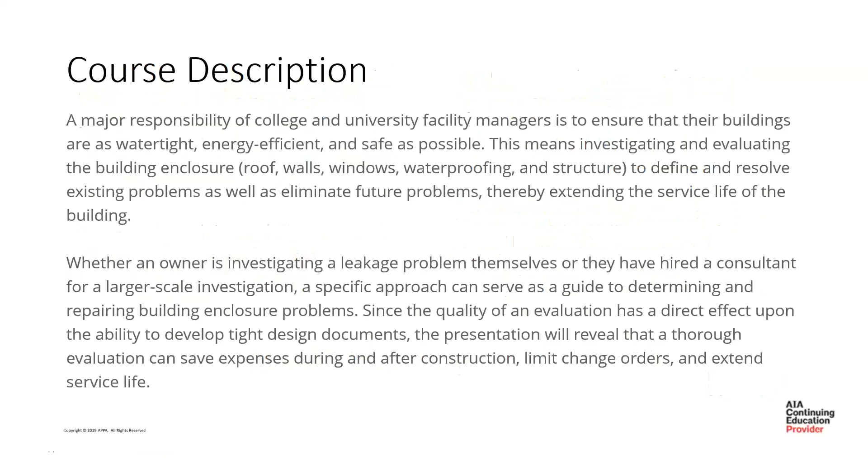As mentioned, I'm Kimberly Kilroy, one of our project managers in the Building Enclosure Design and Consulting Group at Gale, and here with me today is Jeff Zisk. We'll be presenting the building blocks of enclosure evaluation, just to give you a sense of our process when we get to a site to evaluate a building, look at defects, and recommend repairs.

Thanks, Kim. I'm Jeff Zisk. Thank you, everybody, for joining us today. So we're here to talk about the building blocks of enclosure evaluation. To give you a little background and the path of how we're going to go through this presentation, we're going to start with review of existing information. Then we're going to get into field inspection and visual evaluation, and also some access methods to do that work, then talk about some testing options, and then get into report and design documents.

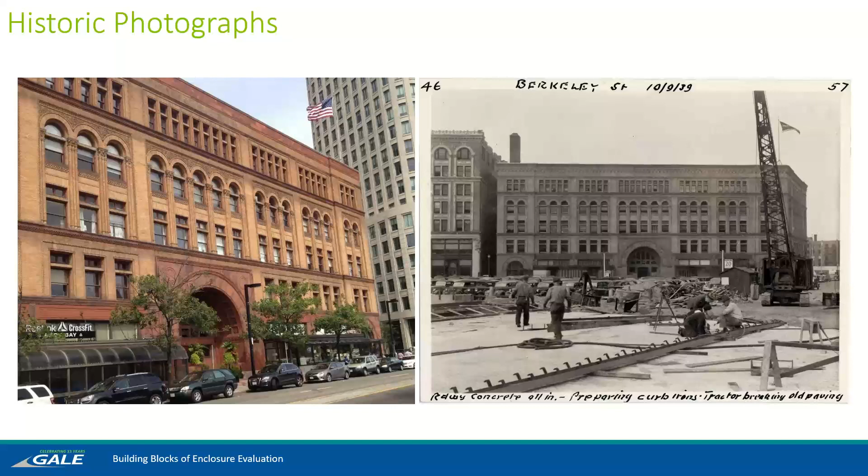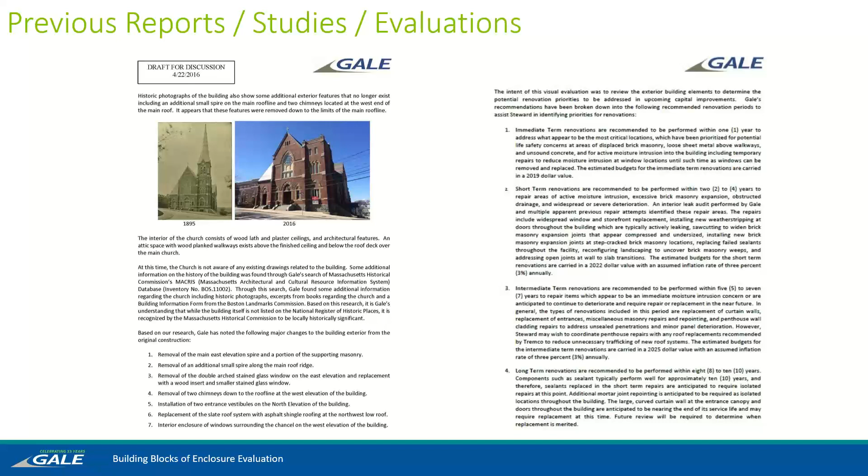Another option would be any previous reports, studies, or evaluations that the owner may have. And these are just a great resource of what's going on with the building, what may be a recurring issue, etc. Similarly, if there's any original drawings available, either from the original construction or from previous renovations, it's a good option to give you a sense of what you'll be expecting when you get on site.

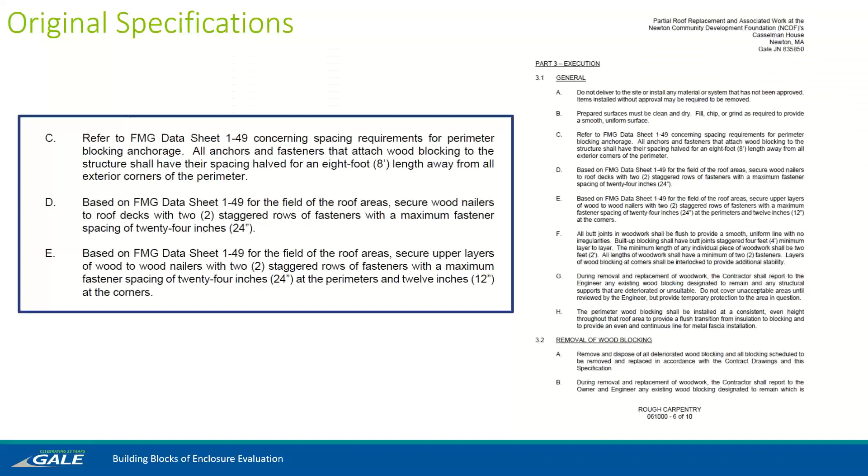And project specifications will give you some more performance-related details. And if you have original submittals for construction, this will give you material-specific information for the particular membrane that was selected, not just the group of them that might meet the performance requirements or whatever your materials may be.

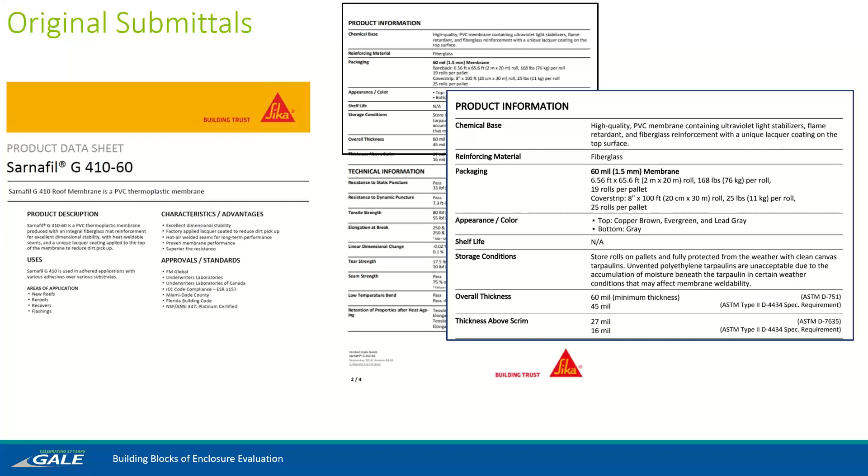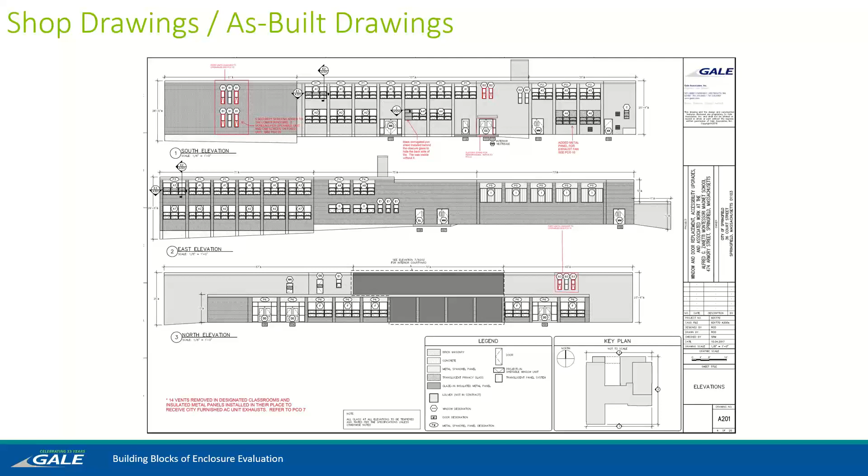On that note, if there's any shop drawings or as-built drawings available from when the building was in construction, this is really going to give you the closest to your current conditions. So I'm sure you've all seen construction projects change as they move along, either due to owner requested changes or unforeseen conditions. So having these as-built drawings will let you know if maybe windows moved around, if we added or reduced the scope, if there were some material changes, etc.

If you don't have any existing information specific to your building, just knowing the approximate time the building was built can also provide you with some general information. You can look at building codes from that time or industry standards, either the Brick Industry Association, FM Global, or other groups that will provide you kind of typical expectations at the time, typical construction materials and procedures, in addition to those code requirements from the period.

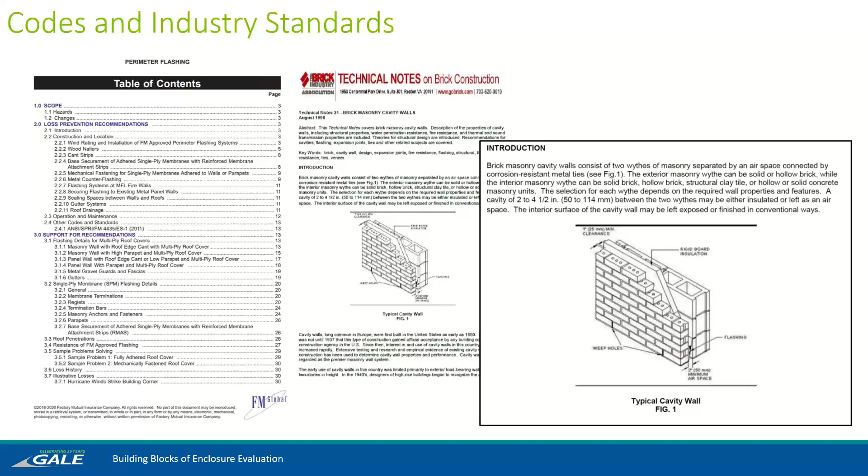Once you've done all of your research, you'll move on to your field evaluation. And this is really when you get out into the field on site and you can get eyes on what you're looking at. I like to start mine off with the leak audit. It lets me walk the entire interior of the site, and most importantly, it lets me talk to the owner and to facilities personnel who are living and working in this building day to day and are going to be much more familiar with it than I am.

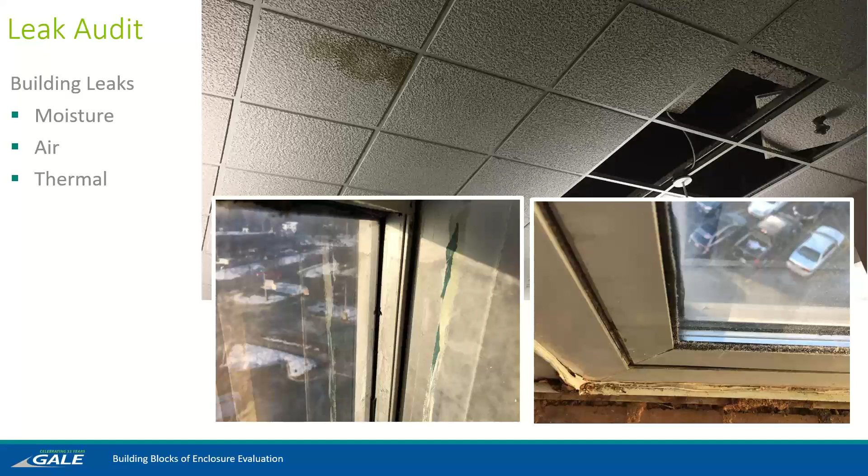While we're doing our walkthrough of the building, we like to document any active or previous moisture infiltration, as well as any airflow or thermal losses that the owner or facilities director might be aware of. This is also a great time to talk about previous repair histories or services that have been done to the building. On this, you'll see just a typical leak audit sheet for an example as we went room through room, identifying the staining, where it was, and discussing with the owner any previous concerns. Maybe it only leaks during storms where the wind blows in a certain direction. Maybe it leaks all the time. It really is going to depend on where you are and the actual specific building you're looking at.

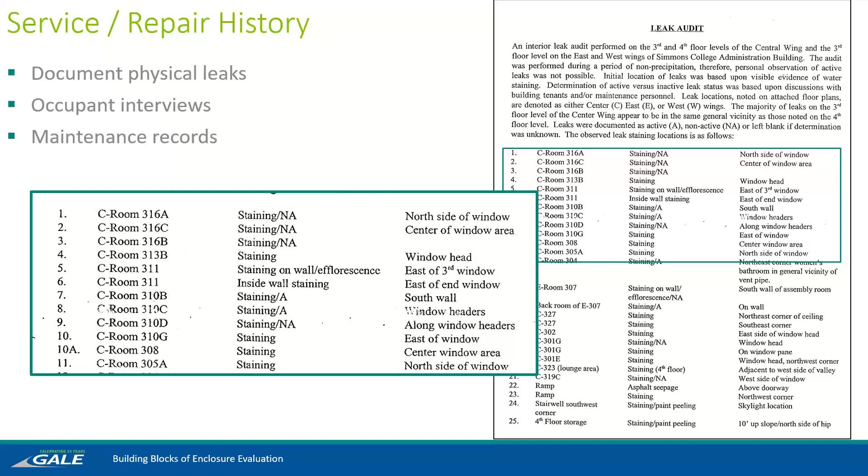A fun side note here, we actually were in Arizona looking at a building where, come to find out, the roof had been leaking for years, and facilities just changed out the tiles every time it rained because it didn't rain that often. It seemed easier than managing the problem. They just addressed that symptom, and so walking through the building, we wouldn't have known if we hadn't had that inside information from them.

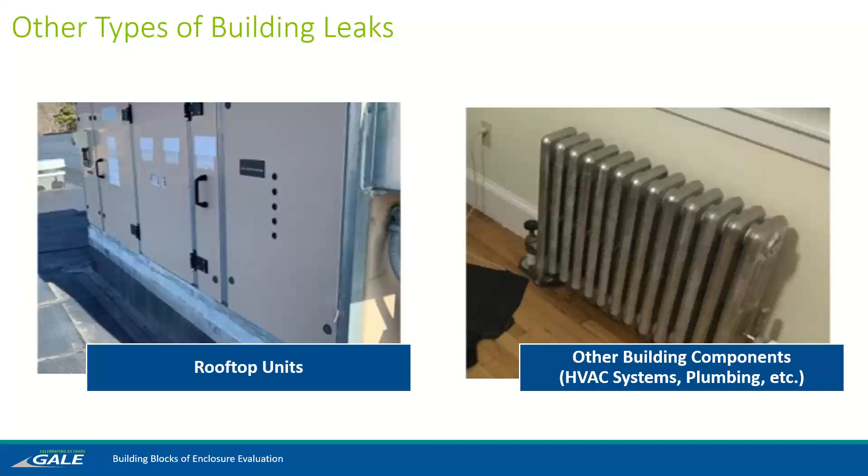One of the big things to focus on when you are doing that leak audit is keeping in mind not every leak is going to be part of your building enclosure. We've seen plumbing leaks, we've seen HVAC system leaks, and one was actually on a roof, but not the roof system. We had a new roof system installed and some existing rooftop equipment, and we couldn't find the source of the moisture intrusion. Went up on the roof, all of the flashings appeared to be in order, the new roof system appeared tight, no punctures, no issues or concerns. Upon opening up that unit, it was filled with standing water that was working its way into the building and presenting as a potential roof leak.

Also, while we're doing our leak audit, we want to note other items in the building. Maybe there's condensation on windows or walls. Maybe there's vegetative growth or efflorescent staining on a wall, or salt precipitates inside of a window. All of these are just providing you more information about the conditions you have.

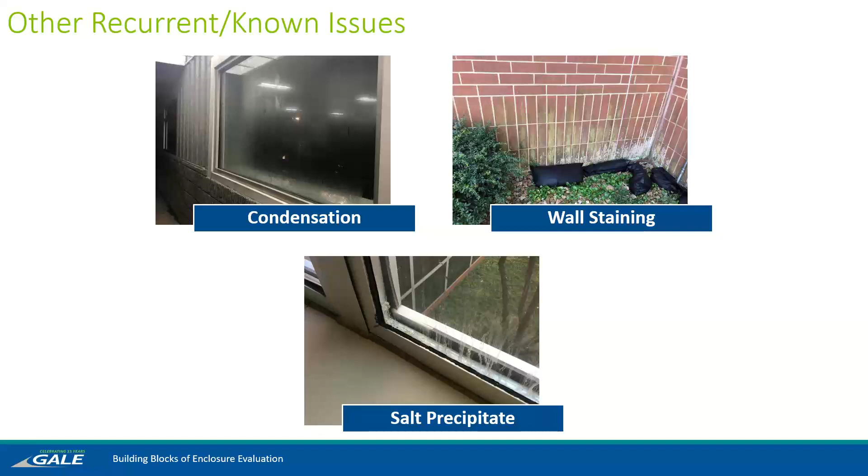So Kim talked about the first step we like to do on site. This might be the first trip to the site to do the leak audit and interview the personnel. Now I'm going to get into when we're actually doing our heavy evaluation and field work.

So now we're going to talk about coordinating the field work, and that includes defining the scope of the evaluation. Are we looking at one specific elevation, or are we going to look at the whole building or the whole facility? We want to identify the work areas. Are we looking at the elevations or the roof and different areas like that? And then organize the information that we have so we have it accessible in the field, and maybe select some test methods that we anticipate using while we're out in the field.

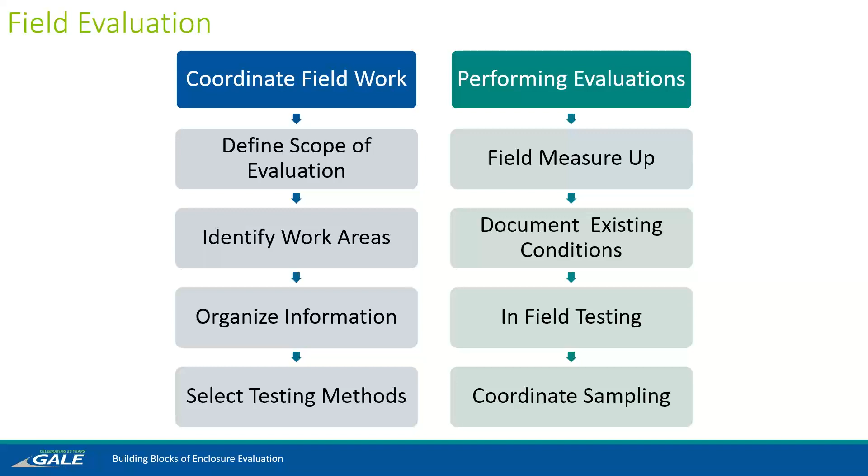And then performing the evaluation. That includes the field measure up, documenting the existing conditions, the in-field testing, and coordinating sampling, and we'll get into the testing and sampling more in depth further in the presentation.

So the visual evaluation, this is when we get eyes on the building to see what the issues are with the enclosure. We're not going to be able to see into the building sometimes, but at least we see what's going on the outside, and we have some other items that will help us see into the building, like test cuts and cores, which we'll go over later on. But this is a great opportunity to get out there. We have some background information, hopefully, before we get to the site, so we understand what the construction is, and then we get out there and we see what the defects are.

So how do we access the building for our field evaluation? There are different methods. The first method is grade level evaluation with high-powered binoculars. Relatively easy to get out there. We just need an engineer or field tech with the binoculars and an iPad or plans to document what they're seeing. There are some limitations to this. If you have a taller building, it's going to be very hard to see the upper floors. Also in congested areas like Boston, you have buildings so close together that you don't have the right angle to see it.

It's really good as an initial step because we can get out there and see what's going on and get an idea of the quantity of the defects on the building. It also helps us identify areas where we may want to get a close-up review later on with other methods. So other methods to access the building would be swing staging.

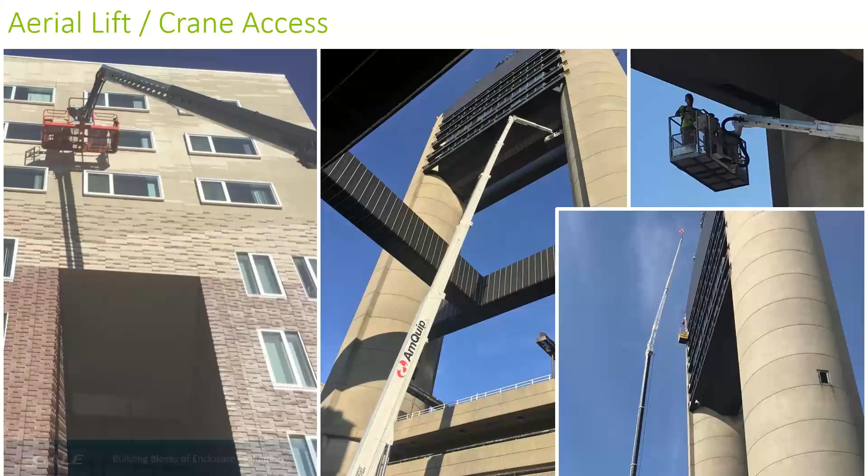Other ways that we've utilized this or seen it done in the past, where maybe you don't have anyone who's certified, is you can utilize other entities who are certified, and you have an engineer or technician on the ground with an iPad and GoPro, and you can actually see what the person rappelling down the side of the building is seeing. So this is a great option to actually see what's going on on the side of the building. We do this sometimes with facade inspections. You need to do a certain amount of drops on certain buildings, so it's pretty useful for that.

One access method that's been gaining popularity, especially lately, is unmanned aerial vehicles, otherwise known as drones. Great opportunity to quickly get up and see taller elevations and roofs and other places which are hard to access. They're pretty easy to get up there. You do have some limitations. You have to have FAA certified pilots, and there are certain restrictions in areas like near airports and other restricted areas where you have to get special permits to do it. But when you can do it, it's really easy.

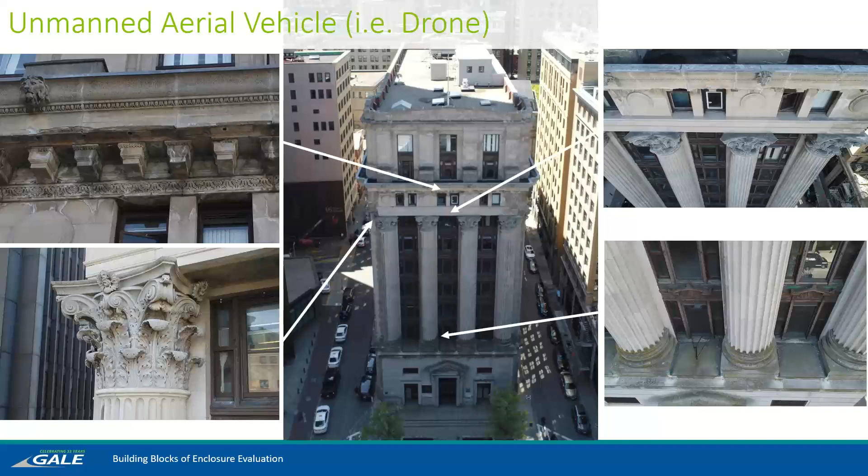This is a project that we did in Boston, and we actually started this one with an initial ground survey with binoculars. We noticed some deterioration around the corners and detail on the top, but we weren't able to see the extent of it until we got the drone out there. You can also see that a couple of these other photos show shelves that you really can't see from the ground. So we wouldn't be able to see if there was any cracking or deterioration in that stone. The drone was instrumental in this project to actually understand what was going on and do a better evaluation.

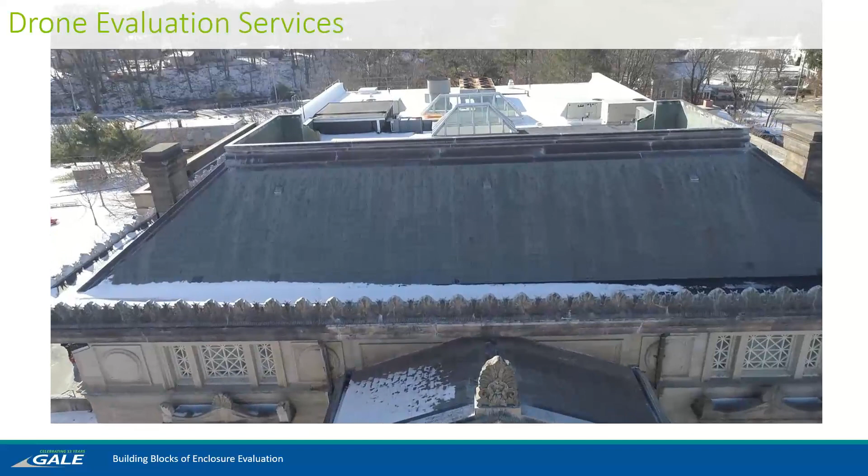Quick video here. This is an evaluation we did for a building and roof with the drone. As you can see, it's very quick from takeoff to get up there and see stuff from heights. One thing drones are very good at is looking at steep slope roofs. As you can tell, this roof would be very hard to access with pretty much any other method. So we can take high def photos of what the roof looks like. We can stitch them together. We can defect off of them. So definitely plenty of options with the drone.

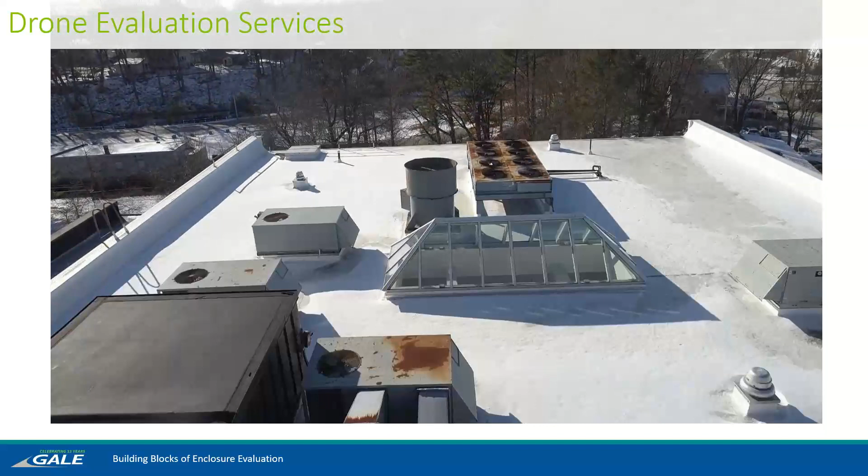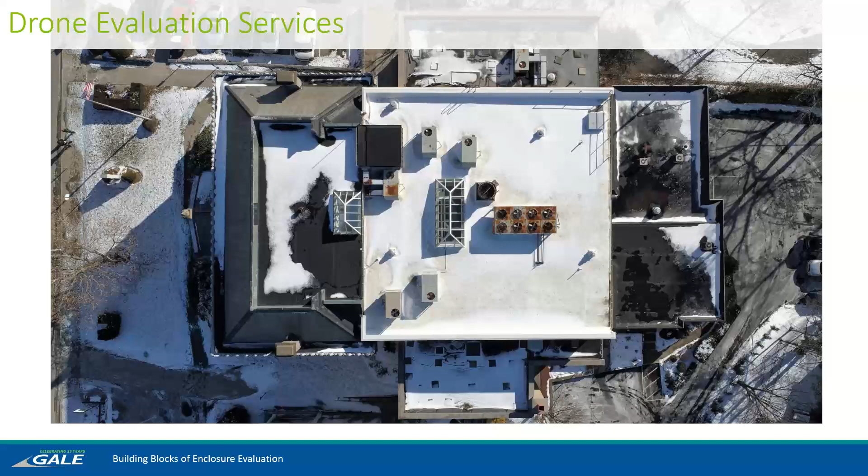We at Gale have in-house certified pilots, so we can get right out there with an engineer and a pilot and take care of the drone survey. The other thing that's great is aerial photos. If we don't have plans of the building, we need something to mark our defects, deterioration and field notes on. So we could go out there for a quick survey and take a couple of aerial photos. That gives us something to use for the field work.

So now we've talked about some of the different access methods. Now we'll get into a little bit of defect identification and documentation.

So when we're out in the field, we utilize checklists, and these help us to thoroughly go through each of the building systems that we're looking at. This one here happens to be a window and door component checklist. So we utilize these as we're going through the field work to make sure we're hitting all the points while we're on site so we can do a thorough evaluation.

So just a couple of things we highlighted in this was test cuts. We'll talk about that a little further, but that helps us to understand what's going on actually inside the building, inside the roof or walls. And then we have information from client as available. So this is what Kim talked about before. As-built plans, original drawings, submittals, everything like that are really important to us because we can understand the building.

It kind of helps us be a couple of steps ahead when we have that information ahead of time getting out there. When we show up to a building and we don't have any information prior to showing up on site, we're kind of starting at square one, and it takes us a little while just to get familiar with the building, how it's constructed, and then get into, okay, what's going on with it, how do we figure out a way to fix things.

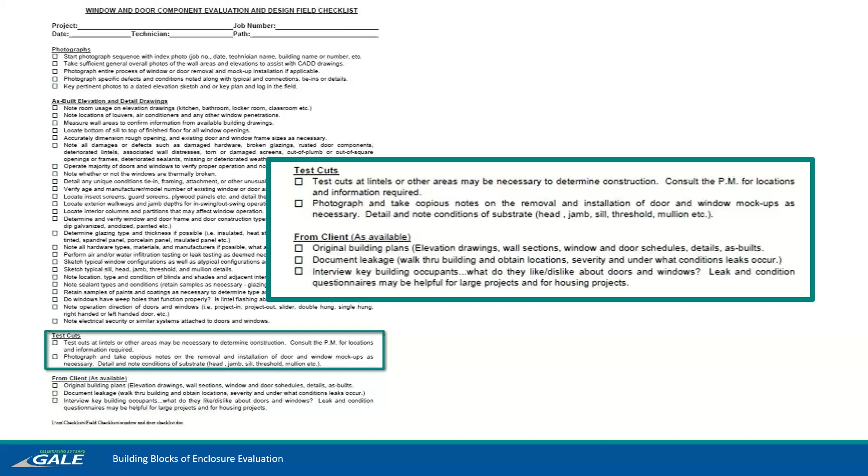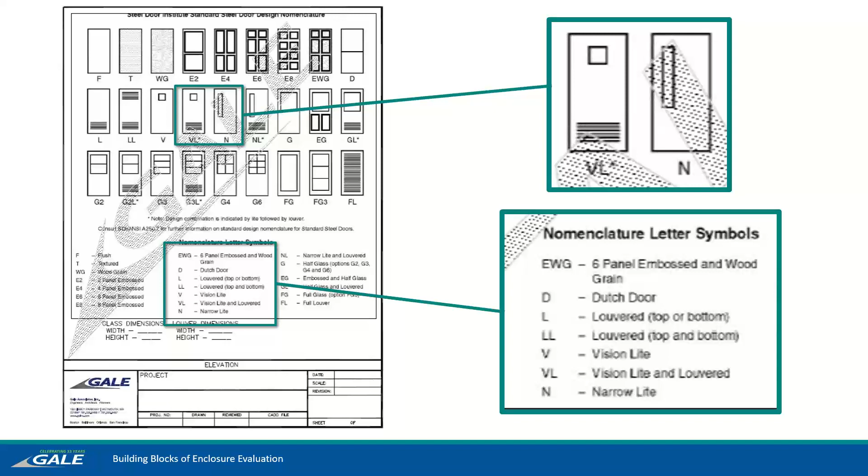Another thing that we use is checklists and also quantity sheets. So this is a door type checklist. So this helps us to very quickly go through if we're doing an evaluation of doors or a door replacement project. We can identify standard types and quantities of doors very quickly.

So now that Jeff has told us how we're getting eyes on our building and also how we're documenting our defects, I'd like to talk a little bit about what those defects might be for your various building systems. We'll start with the roof and work our way down. So if you have a roof system on your building, it could either be steep sloped or low sloped. Looking at these steep sloped roofing options first, you could have asphalt shingles, you could have slate shingles, potentially metal roofing, either low or steep sloped, and tile roofing.

You'll see in your top left photo there an asphalt shingle roof, which has experienced granular loss and what's called shingle bake. Often this will be the result of inadequate interior ventilation to allow those shingles to heat beyond what they were expecting in a temperature range and just accelerate deterioration of your system. In your top right, you can see an overall of that same roof, which is kind of your worst case scenario for shingles. At this point, they've actually had to go in and apply large area patches over the roof just to kind of put a Band-Aid on the problem until they were able to perform a widespread replacement.

Some slate shingle defects you might encounter would be cracking, displacement, breaking off of a full section of your shingle, or what's called shedding. Shingle shedding is usually something that occurs in the first year or two after your roof has been installed. And this is actually individual shingles falling out of that roof system, either to a gutter or to grade level below. Metal roofing is susceptible to corrosion, oil canning, or displacement.

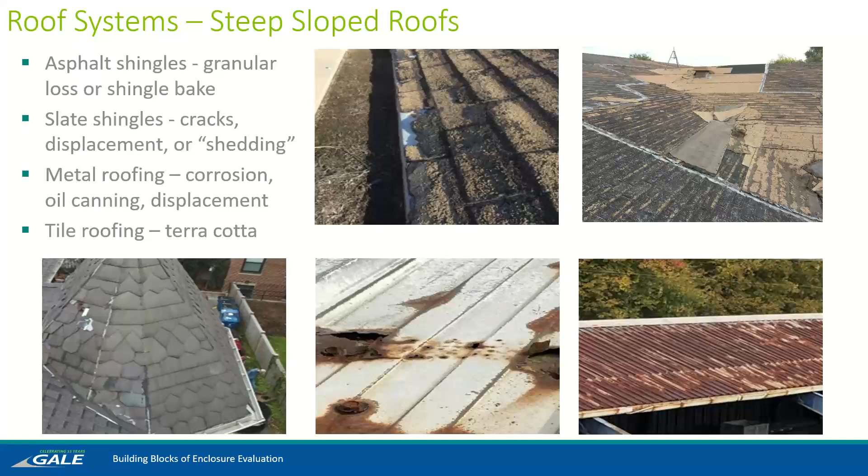If you have a low slope roof system, you could have a single ply membrane roof. And those would be a PVC, EPDM, or TPO roof systems. These are particularly susceptible to puncture. You can see in that top right photo, that corner flashing, it appears something's gotten caught on it and ripped that membrane open. You can also have unadhered or open seams or flashings, the bottom right photo.

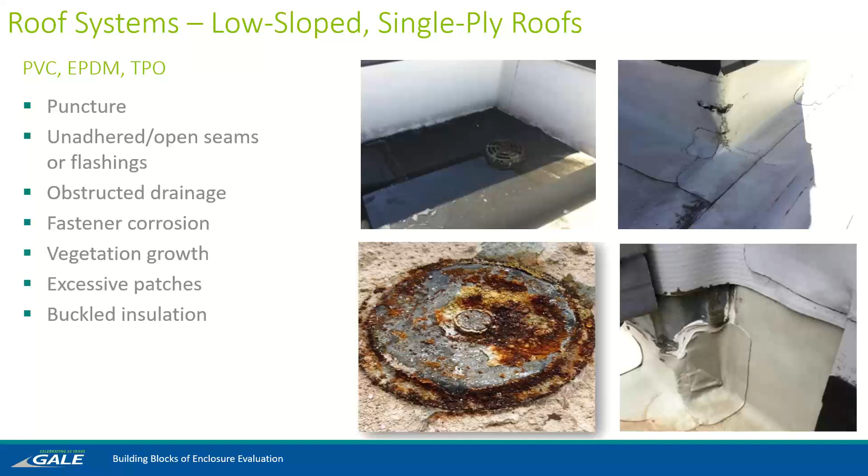You'll see we have sealant terminating the lower flashing, and that upper flashing section is unadhered and open to wind-driven rain. Obstructed drainage can be a concern on any roof, as you'll see in that top left photo, as well as corrosion of fasteners. Once again, you'll see in the bottom left there under your membrane. You could see vegetative growth in the top left photo or bottom right photo.

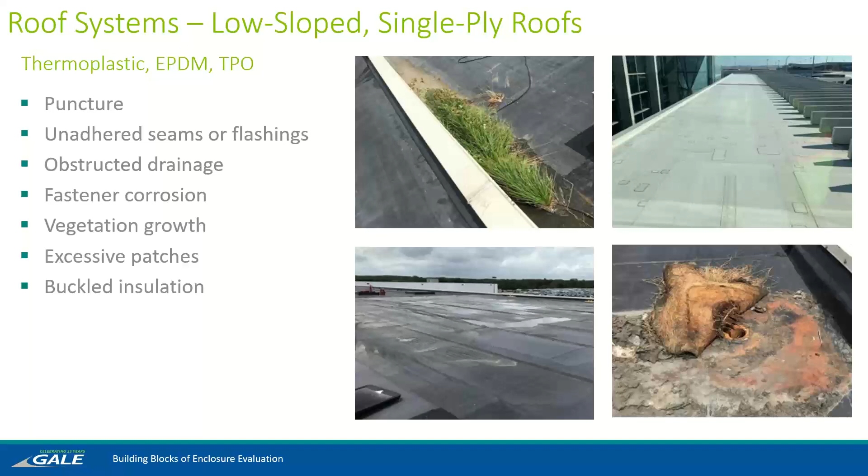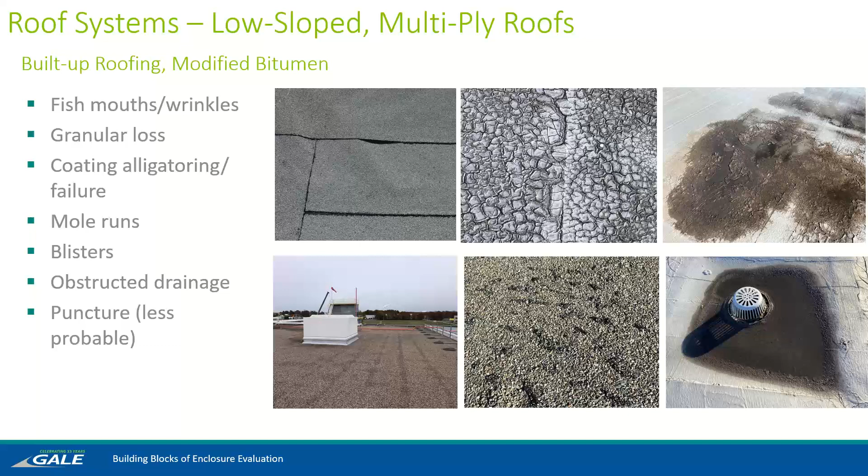Some potential concerns would be obstructed drainage, once again, especially with these roofs where you do have all of that growing media. Membrane puncture, again, with all that growing media above it, you really want to make sure that your membrane is good to go before we put that on. You don't want to be pulling out plants and soil and trying to find that one leak that maybe doesn't even line up with where moisture is coming in.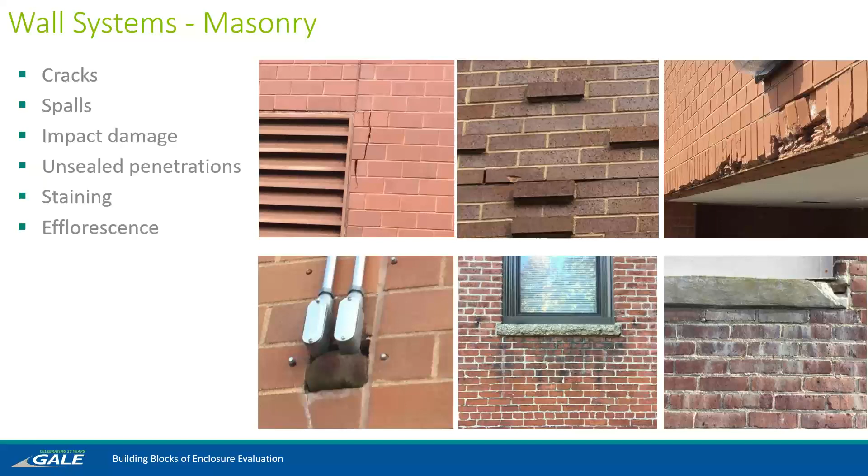So something like this, if we had gone out and just looked at the damaged brick, removed them, replaced them, and we were on our way, the next time a truck backs into that loading dock, we're going to redo that damage. With that in mind, you always want to look past your symptoms and try and find the source.

Similarly, step cracking in masonry, widespread deteriorated mortar, rust jacking, or masonry displacement. For example, that bottom left photo, you can see the corner step crack there coming off of your window opening. Most likely, this is the result of rust jacking, and that's going to be your steel lintel beginning to deteriorate.

As steel deteriorates, it expands to up to 10 times the size it started. It's going to put a lot of pressure on that brick masonry that it wasn't expecting, resulting in the crack. So again, if we just rebuild that crack and we're not addressing the main cause of the issue, we're going to see those repairs be done time and time again.

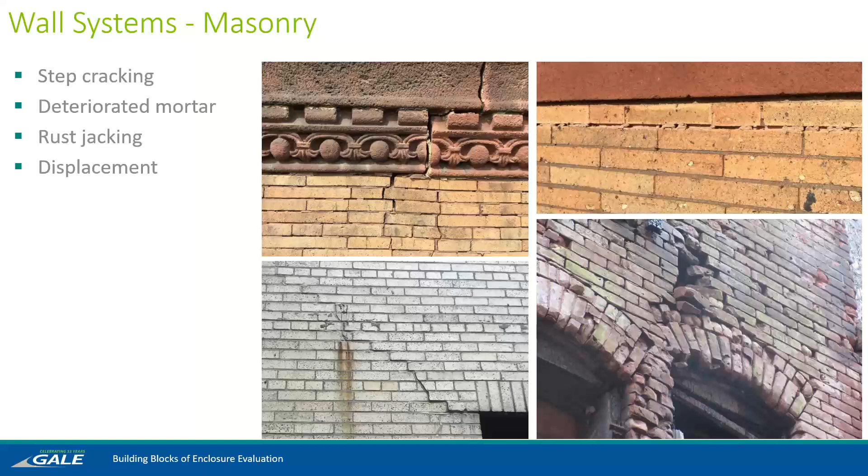Your bottom right photo is really just your worst case scenario. If you don't keep up with that building maintenance, you're not repointing those brick joints, eventually you'll get to a point where the deterioration and moisture infiltration is so severe, full sections of your brick wall are starting to fall off.

So to continue on the wall theme, we're going to think about some concrete wall defects that you may see. This could be cast in place or precast concrete elements. So those include cracks, spalls, and exposed reinforcement. Those are kind of the typical ones that you would see.

So top left photo, you can see a spall there. That was actually at the bottom of a wall section. There was some debris and wood in the bottom of potentially the formwork, which caused that spall to accelerate and pop off. You also have cracking on the left, which is just cracking, but because it's in an area, that cracking could result in a big spall coming off, which could really result in exposed reinforcement.

And then the middle photo there on the bottom, that is exposed reinforcement. And the issue with that is left untreated, that corrosion will actually extend further on the reinforcement, and it could start popping off adjacent sections there.

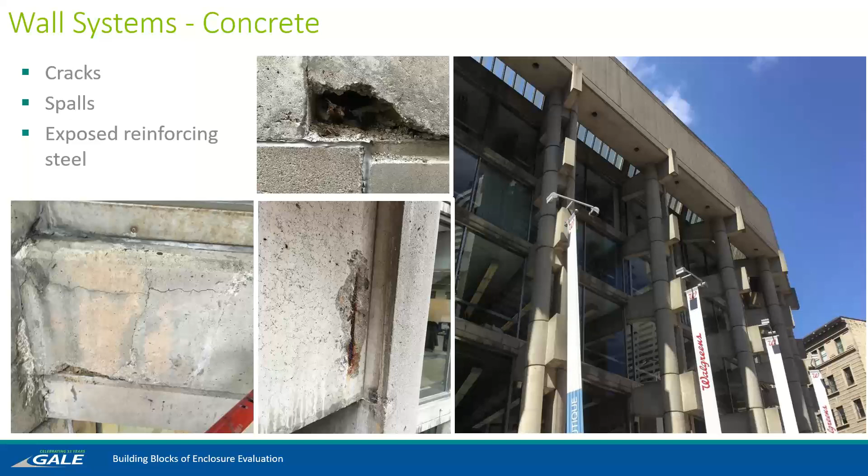Exposed reinforcement, there's a couple different reasons that it's caused. There's a potential that there was not a proper clear cover of concrete over the top of the reinforcement from original construction, so moisture was able to work its way in and corrode that steel. There's also, if you're near the ocean or something like that, you could have salts and other things that are getting into the concrete if it's very porous to corrode the reinforcement.

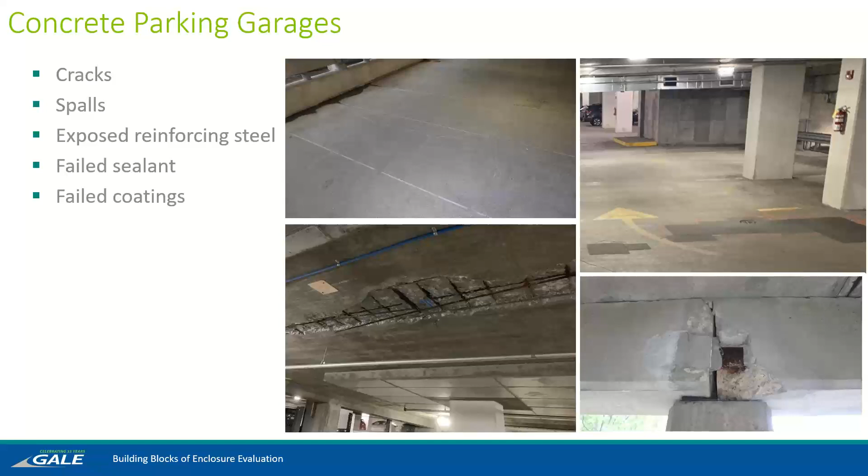So similar with concrete structures, you also have concrete parking garages and slabs. So they're going to have very similar defects: cracking, spalls, exposed reinforcement. Parking garages typically have a lot more sealant joints at expansion joints and different panel systems. And you could also have failed coatings, which could allow for moisture to get into the concrete below.

So windows, there's failed sealants. That could be perimeter sealants or actually glazing sealants. You have damaged screens, damaged gaskets. As you can see from the top right two photos, you have a perimeter sealant and damaged gasket on the right. You could also have failed glazing seals around insulated glazing units or broken glazing. You have air and moisture intrusion issues, and then also just deterioration of the frame.

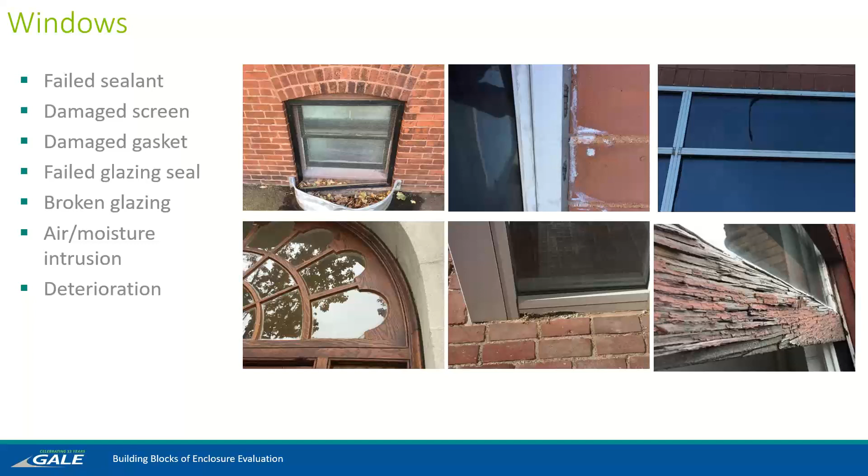So looking at the top left photo, you have a screen. It's actually just an insect screen, but it's deteriorated. You could have security screens on lower levels. And then the bottom right two photos is actually deterioration in the frame. So the middle photo is an aluminum frame that's actually been deteriorating along the masonry joint there. And then the bottom right photo is a wood window, which has heavy weather checking. So wood windows have their own set of problems.

So doors, you could have failed sealants, failed weather stripping. That's very common. As you can see from the top left photo, it's half missing. You could have displacement of the door or frame, or deterioration of the door and impact damage. Impact damage is very common around loading docks or other maintenance access points. So when we're thinking about doors, we also want to consider rooftop access doors.

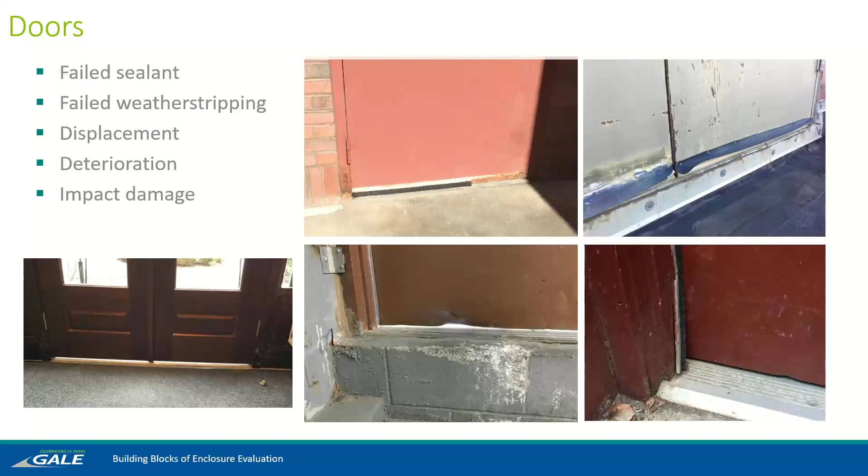So when we do a roof evaluation, we want to kind of look at any roof access doors and how a roof system or roof system replacement will impact that door. Last thing we want to do is go and design a full roof replacement, and the access door had a problem and was leaking, and it presents itself like a roof leak, which is right adjacent to it. So we kind of consider that part of our roof assessment when we're looking at that.

So in addition to looking at each of these individual building components, we also really want to take the appropriate amount of time and attention to focus on the transitions between the systems. With this, the devil really is in the details. It's a very small percentage of your building where these systems transition between each other, but it's often a lot of your building's issues and concerns.

The reason being that each product manufacturer and each trade is really focused on their work area. They're not necessarily thinking, when I finish building this wall, how am I tying it to the roof? How am I flashing my window into the surrounding wall? And so we like to consider those roof to roof, roof to wall, roof to window, and roof edge transitions.

On that top left photo here, you'll see that your roof parapet cap has been flashed to the brick masonry rising wall with an adhered membrane section. The issue here is the brick masonry is meant to take on water, but it weeps back out. So now that we've trapped that water from the brick wall, it really has nowhere to go except either into your parapet or down into your roof, or maybe even into the interior of your building.

Similarly, in that top right photo, you'll see the roof system has been flashed right up against the frame of your window. This is a big concern because windows are not a waterproof system. Windows are a water management system. They're going to take on some amount of water, which is why manufacturers have weeps at the bottom of those windows. Unfortunately, because of the way we flash the roof, we're now weeping into that roof system, and again, potentially into the interior.

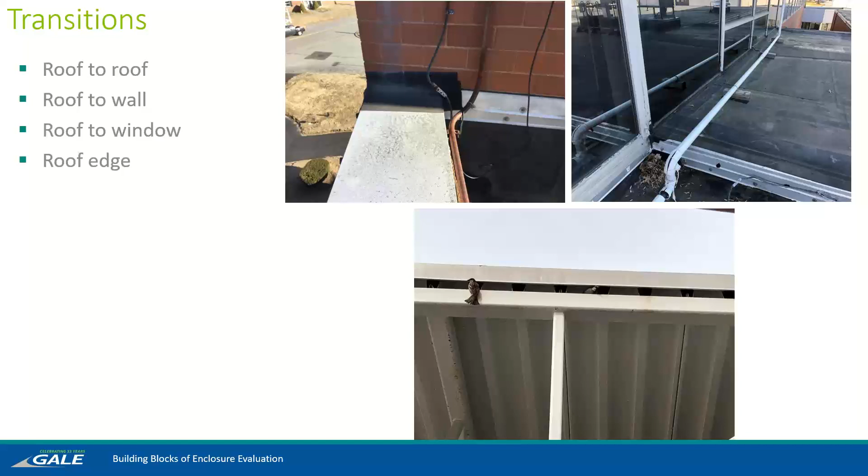And we're going to refocus again on that roof to wall transition because this is the one that we see the most. Here you have your roof membrane coming up, and we have an exposed termination bar mounting that roof system to the surface of your brick wall above. Again, your brick wall is going to take on water, and we've given it nowhere to weep back out now except into our roof system below.

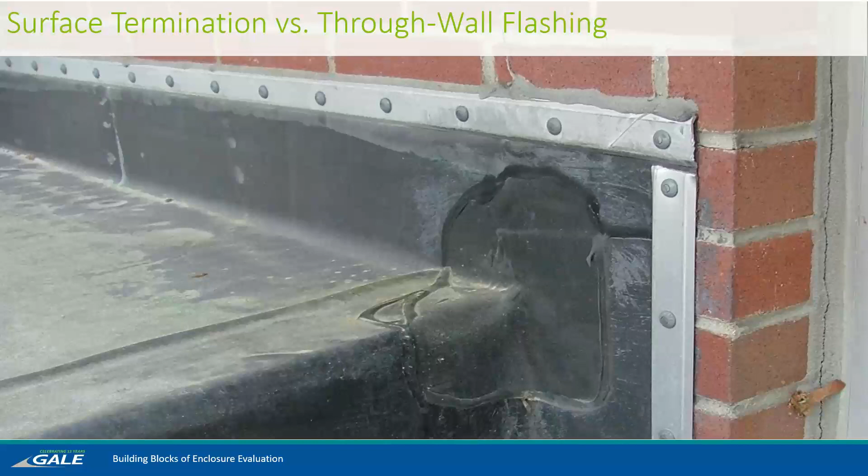Instead of this configuration, we would recommend a through-wall flashing. It's not just a through-wall flashing, though. It's about having the right through-wall flashing. We want to make sure that we're extending that beyond our roof edge. We recommend a good 8 inches past the edge of your roof because water is going to travel through your brick masonry, not necessarily perfectly vertically. So as that can move across the wall, if we extend 8 inches beyond, we can capture that moisture, weep it back out of the wall above our roof flashing, keeping it out of our roof system.

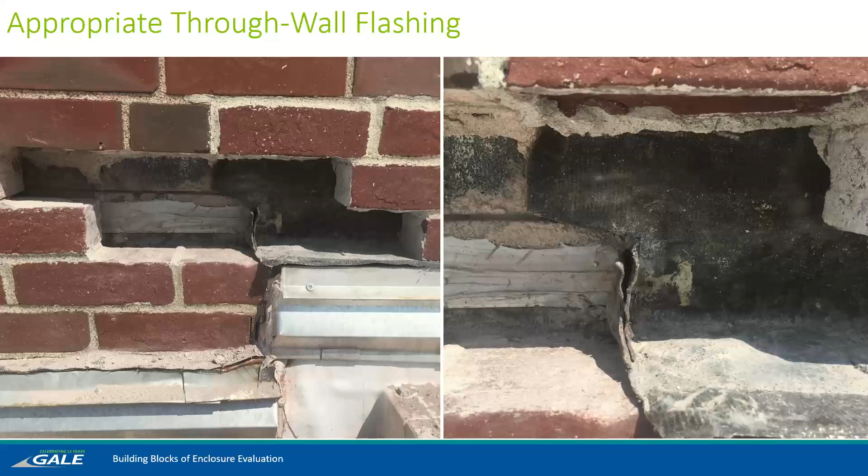So now we've gone through a lot, just a sample of some defects you would see with these types of wall systems and roof systems. There's all kinds of different defects and conditions that you can see. This was just kind of a sample. So now we're going to talk about some of the performance criteria that we're getting into. We're thinking about this when we're evaluating the building and putting together our reports and everything like that.

So for roofs, we want to think about the structural capacity of the roof deck and the roof framing. That may be related to snow loading or drifting snow. Sometimes with older buildings, owners will have us look at the drifting snow conditions at rising walls and actually design reinforcements as part of a roof replacement. But we want to make sure that the structure can handle the new roof system that we're proposing or what's on there now.

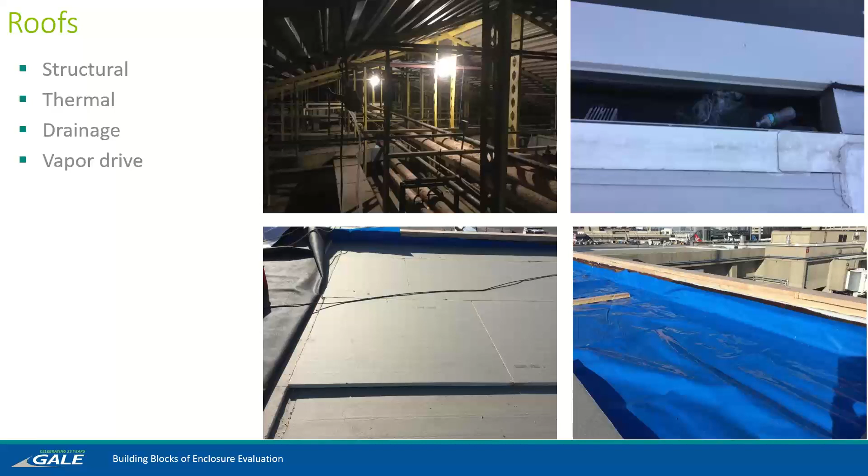Then you have thermal issues, so we want to make sure that we're bringing it up to the current R value for the roof replacement, having multiple layers of insulation staggered. We want to think about the drainage concerns. That could be internal roof drains or gutters or scuppers. Also, secondary drainage is required in quite a few states, so we want to make sure that we have proper secondary drainage if those primaries get clogged so that the roof does not overload with excess water. You also have vapor drive. So that's where we want to consider vapor retarders and make sure that they're in the right place in our roof system.

So for windows, you have a structural concern. This is the attachment of the window to the structure itself. You may have punched window openings or clerestory windows or curtain walls. You also have thermal. We want to make sure that we have proper insulated glazing units and also thermally broken frames as much as practical so that we can get the required U values for those window openings.

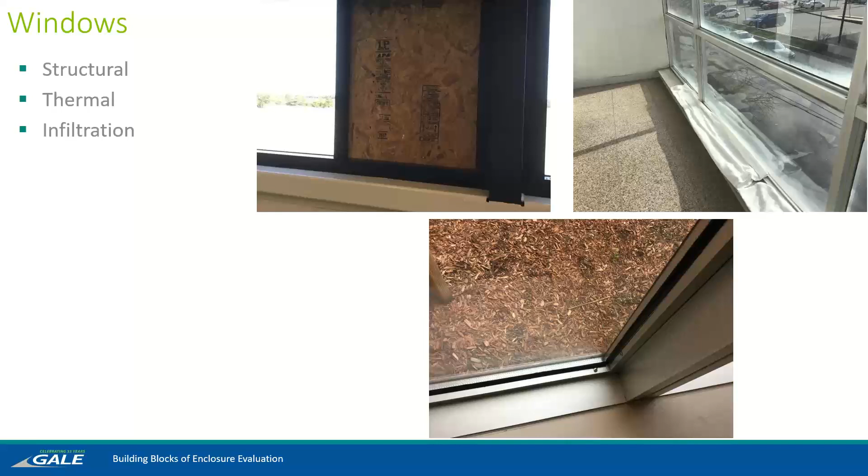And also we want to think about the infiltration concern. So we want to make sure those weeps are open. Like Kim mentioned earlier, the weeps below the roof, that's not a good thing. So we want to make sure the weeps are open, and also we want to make sure that the openings are properly flashed so that any moisture that gets in above the lintels or around the window frame gets out of the wall and doesn't continue to go into the building.

So walls, there's many different types of wall systems. We want to think about structural concerns. For the masonry walls we have shown here, you could have a masonry veneer that's tied back with lateral ties, or you could have a mass masonry with headers holding that outside wythe in. You also have drainage concerns. We want to make sure, like Kim was talking about, the through-wall flashing is properly installed at the base of the wall, between floors sometimes, and then also above any stone elements.

Thermal concerns: in a lot of mass masonry walls, you don't have insulation in the wall, but in cavity walls you do. So we want to make sure that we're insulating walls properly and not changing the dew point and messing with the wall construction itself. And then infiltration. Most wall systems are meant to take on water, like we talked about previously, and we just want to make sure that we don't have large openings that allow bulk water in.

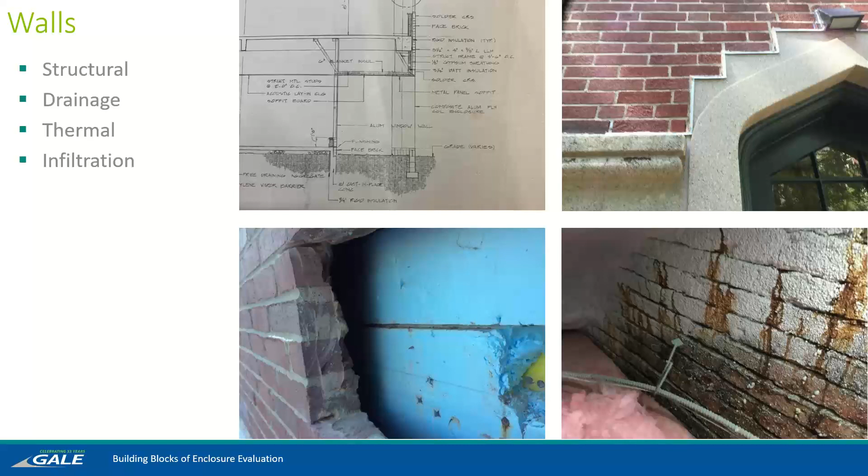So a lot of times what we see when we're evaluating buildings is conduits or different penetrations have been put in by a trade contractor, and then it's not sealed up. So those are a lot of the areas where you're getting a lot of bulk water in. If you get too much water in the wall system, the wall is not meant to handle that and it will work its way into the building.

So that'll bring us to testing. Again, we've already done our research. We've gone out on site. We've looked at the building. We've walked through it. We've spoken to facilities. We've mapped defects on our elevations. Now we're going to hone in on those areas where we want to do some testing to get a better understanding of what's going on.

The point of this testing is kind of threefold. We want to verify our hypothesis. We want to recreate and trace the path of those leaks that were documented during our leak audit. We want to correlate the testing with the observed damages and those defects that we saw.

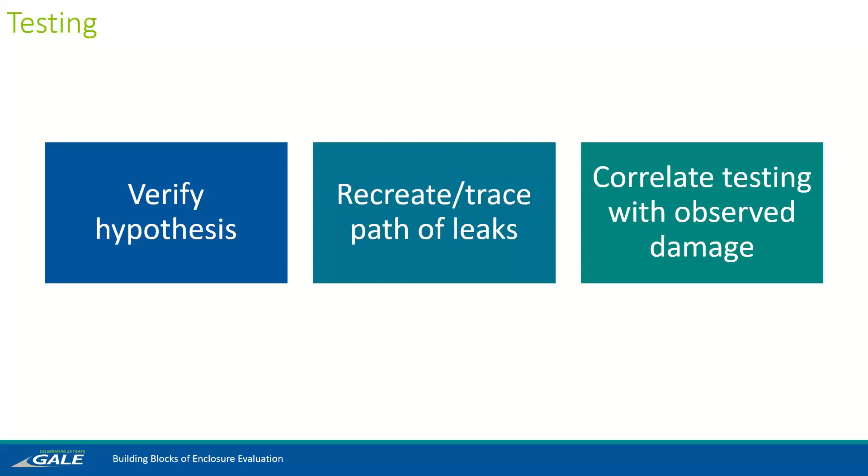The last thing you want to do is look at the outside, mark up your defects, go to the owner, get them fixed with the contractor, and then still have a building leak. So we want to make sure that what we're seeing is lining up with the interior symptoms so that we can address the appropriate sources.

Types of testing available too would be non-destructive, destructive, and laboratory testing. We're going to walk you through a couple of sample options today. This is by no means an all-inclusive list. It's just to give you an idea of the type of testing that we may use individually or in conjunction with each other while we're evaluating a building.

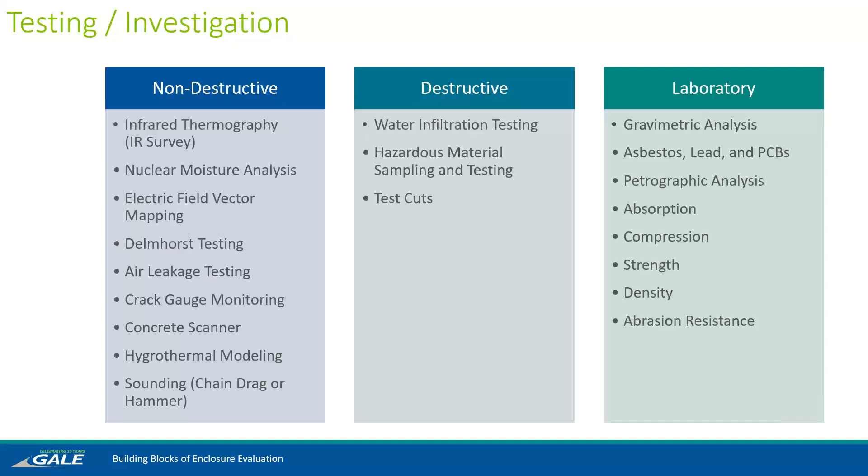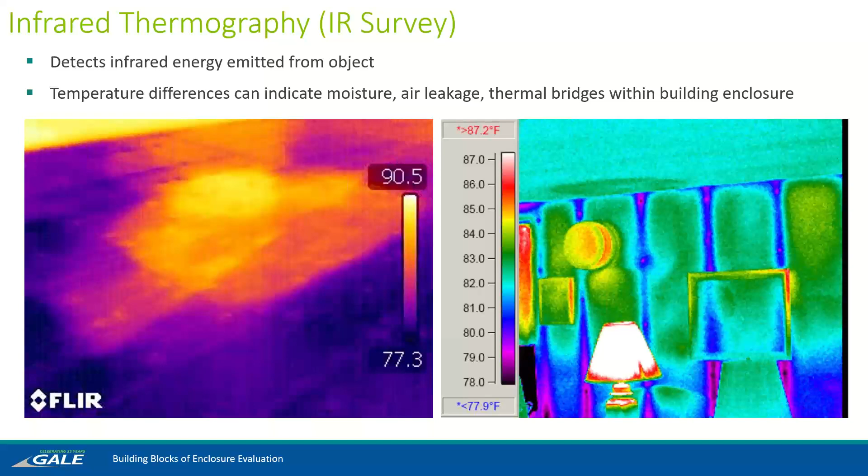Photo on the right, you can see those vertical blue lines, which are actually studs, and you have the green in between them, which is a cavity filled with insulation. One of the big things we like to keep in mind with the IR surveys is that not every anomaly is an issue. You also see a very white, hot blob in the bottom left of your right photo, and it's actually a lampshade when you take a closer look. So again, this is locating anomalies that could point to moisture, air leakage, or thermal bridging, but we would want to do some follow-up. We would want to be analyzing these appropriately.

Another option available too is electric field vector mapping. This is a great option in particular for vegetative roofs. As we talked about, if you have a small puncture in that roof, the last thing you want to do is dig up all of those plants you just put in and all of that soil. Even if you have trays, it's a huge amount of labor picking up each tray, removing it from interlocking with the adjacent ones, moving it somewhere else, and trying to locate that leak.

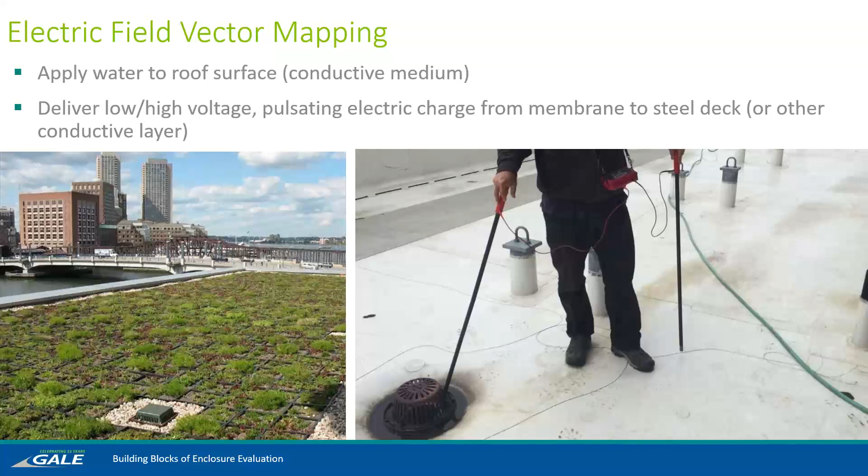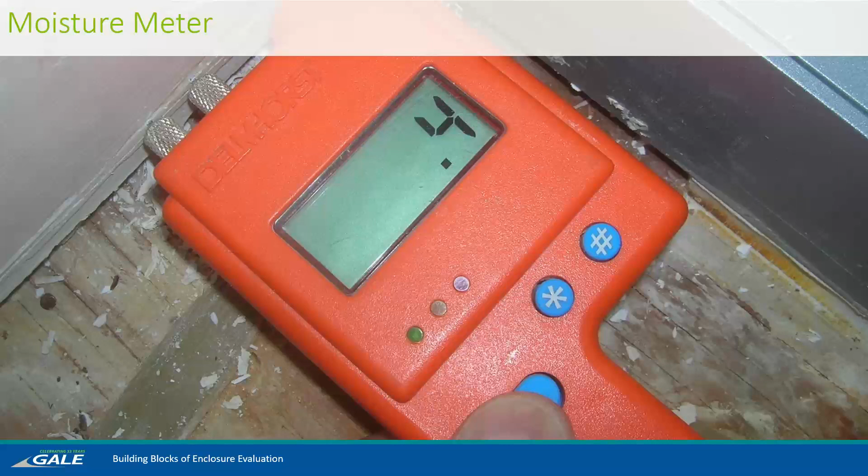So if we can plan ahead, if we have a concrete deck and include some sort of conductive media, or if we have a metal deck, it's a great option to identify those leaks via a grid rather than removing all of your soil. Some other options to identify potential moisture in a roof system would be a nuclear moisture analysis or a capacitance moisture survey. If you have opened up your materials, be it a roof system or a wall, you have a moisture meter available to you that can give you the percentage of moisture in that particular material.

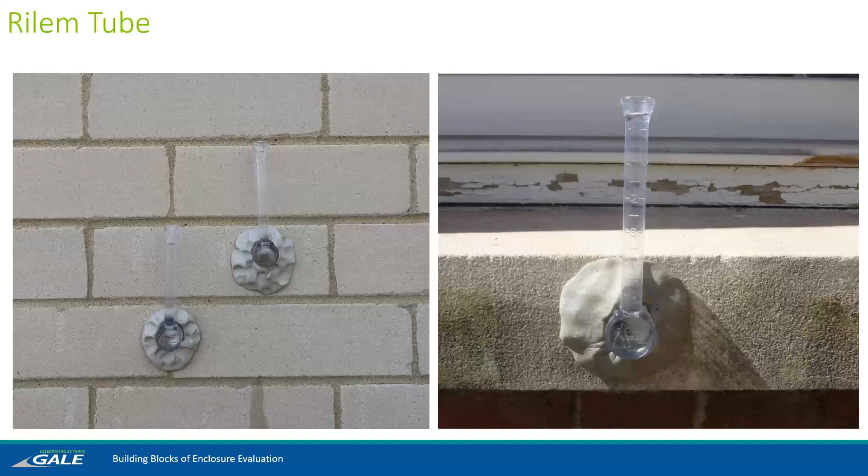We also see a lot of RILEM tube testing when we're working on evaluations, and this is really used to get the porosity of your materials, whether it's your brick, your mortar, or your stone. How quickly water is absorbed and how much water is absorbed will give you an understanding of the porosity. This in particular is useful on older buildings where we're trying to do repairs in kind with the original construction and have something compatible with those existing materials to repair.

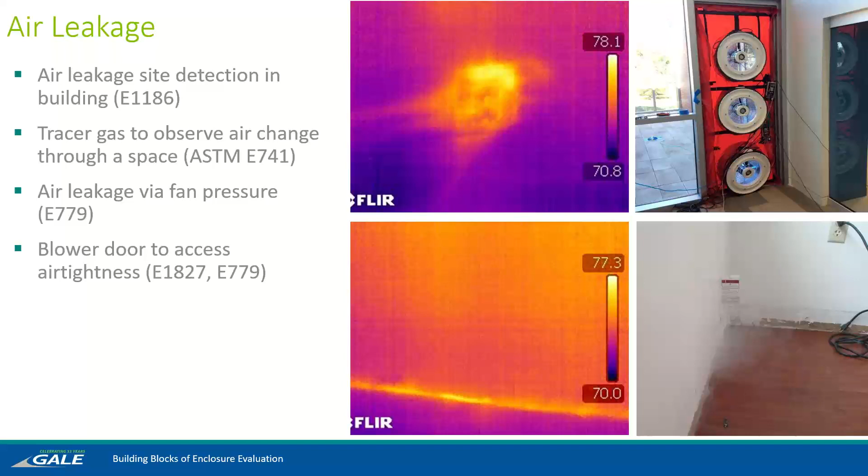So crack gauge monitoring is another option for observing the crack and how it's moving over time, especially with concrete or masonry. This can help determine if you have issues with settlement. Is it short-term settlement or long-term settlement, or is it something that's continuously moving? So this will help us to determine if we just repair the crack in place, is it going to crack again, or is there something else going on with the building that needs further review?

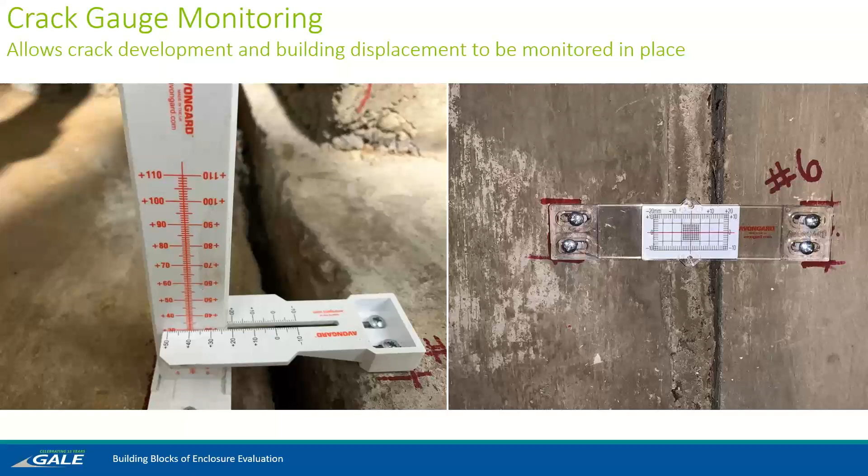So this is not a quick test. Usually this is something that gets installed and then monitored over time to see what that movement is. Concrete sounding can be done with a hammer. This can also be done on brick. You're looking for hollow sounding areas, which indicates that there's a void in the concrete or an air pocket. Typically it's a delaminated concrete area, so sounding can be done to find that.

So similar with sounding is chain drag. This is just another method to do a larger area of sounding. This is used primarily on parking garage structures or roof decks to find the deteriorated areas that may be kind of hidden under the surface. So as Jeff mentioned, that chain drag is a great option if you do have a large area that you're looking at. And after you've honed in on where those anomalies are, areas that might be of concern or of interest to you, we would look to other technologies available.

You could use ground penetrating radar or a concrete scanner. And this can help you get your slab thickness, your reinforcing steel spacing and depth, and identify any other anomalies in the slab, either pieces of wood or something else that may be in there. I actually found one slab with most of an extension cord in it. While they were placing the concrete, the extension cord was dragged across the slab. Clearly, as it started to set up, no one realized this, and by the time they did, they decided to just cut both ends of the cord and leave it in the slab.

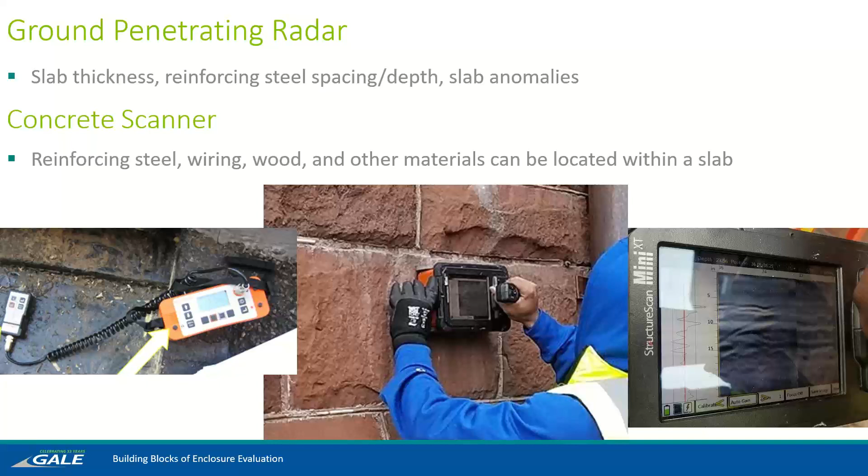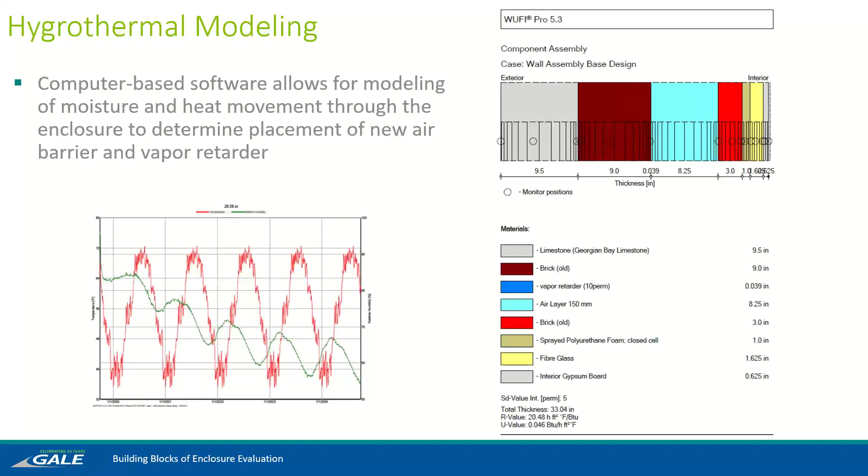Another option too, not really a test method per se, but a great tool in your toolbox, is hygrothermal modeling. You often hear this referred to as WUFI, as that's one of the softwares available. And this is really just a computer-based means of identifying where your dew point is going to be in your wall. You would input each of your materials, its thickness, all of the material densities, your temperatures, your relative humidities, and once you've identified that dew point by running the program, it allows you to place that vapor retarder Jeff had talked about in the appropriate place in your system.

Moving on from non-destructive testing, we'll go through a couple of options for destructive testing. Before that, we're going to talk about the kind of in-between test. I consider water infiltration testing to be destructive because we are applying water to your building. We're trying to create a leak, so there's a chance that water is going to get inside and damage something on the interior. That said, water infiltration testing can be preventative or it can be for troubleshooting.

During new construction, a lot of window projects will use AAMA standards for testing, and they'll test the mock-up and a percentage of the windows to confirm that we're not allowing moisture into that new system. You can also use it for isolated testing with ASTM standards of building walls or other components. And really, if you're doing it as a troubleshooting method, you're trying to recreate that leak and find the path that water is working its way into the system.

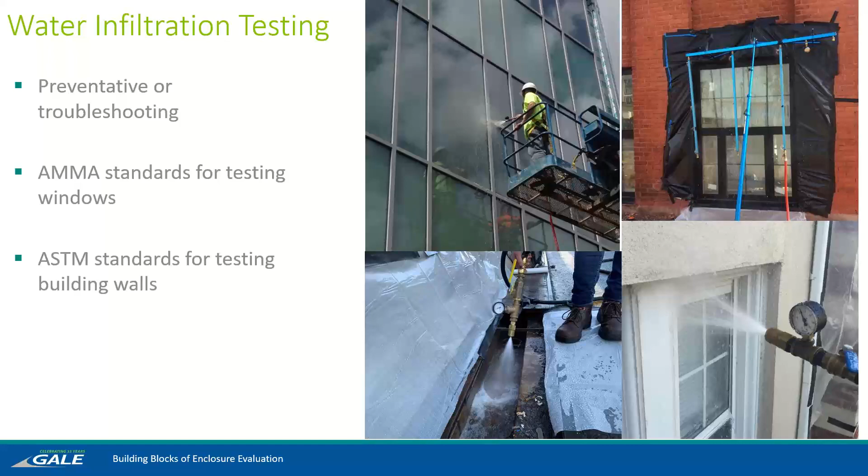Moving on to true destructive testing, you can take test cores where you're, as it sounds, actually coring out a section of your material that you then have as a sample. This will allow you to figure out the depth of your material, how its consistency may or may not change across that depth, and also provide you with samples for future laboratory testing. Hand in hand with test cores would be test cuts.

Destructive test cuts are a great option when you can do them because they allow you to get your hands and your eyes on the actual in-place conditions. You're physically opening up that roof system or that wall and seeing exactly how it's configured.

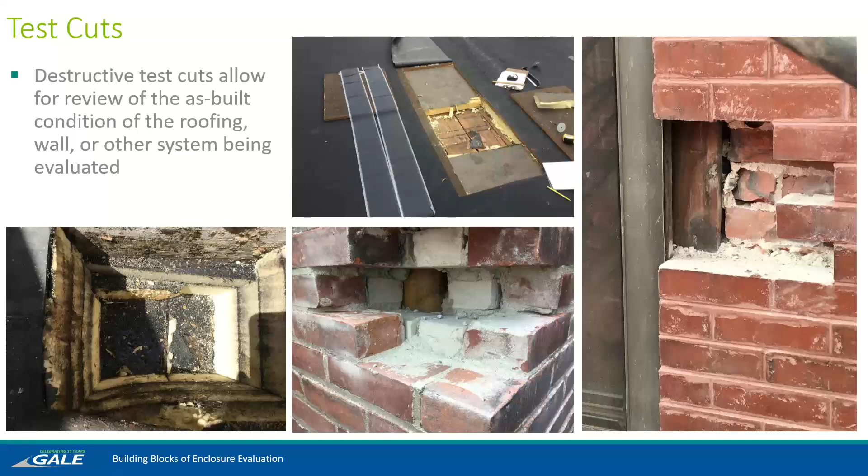And again, test cuts are not going to be done throughout the entire building. You would pick those small areas that you want to focus on, and those would provide you with an understanding of your existing conditions. While you're doing those test cuts, it's the perfect time to take your samples for hazardous material testing. We would strongly recommend employing a hazardous material consultant for this.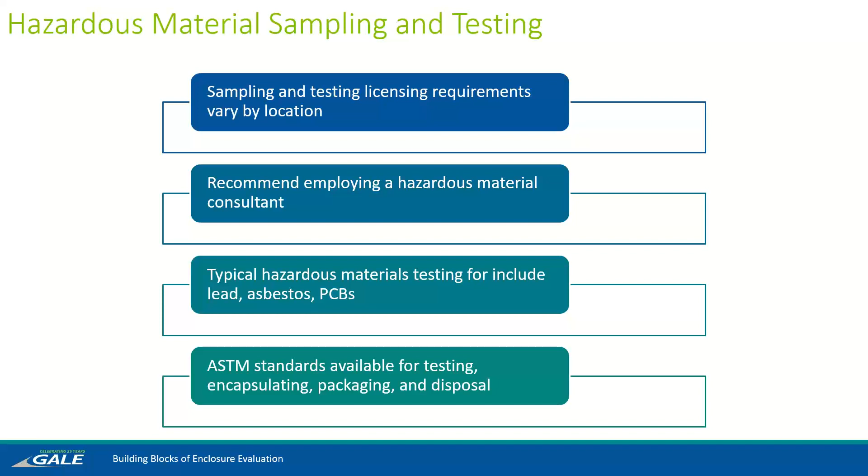The sampling and testing licensing requirements really do vary by location, and they change over time. So you want someone who's really focused on that and able to test for you for lead, asbestos, or PCBs. We really want to try and get this done during the evaluation stage so you know what you're getting into. If you proceed with the evaluation without hazardous material sampling and testing, you might uncover something during construction, and at that point in the game, it's going to add a lot more cost and may delay your schedule.

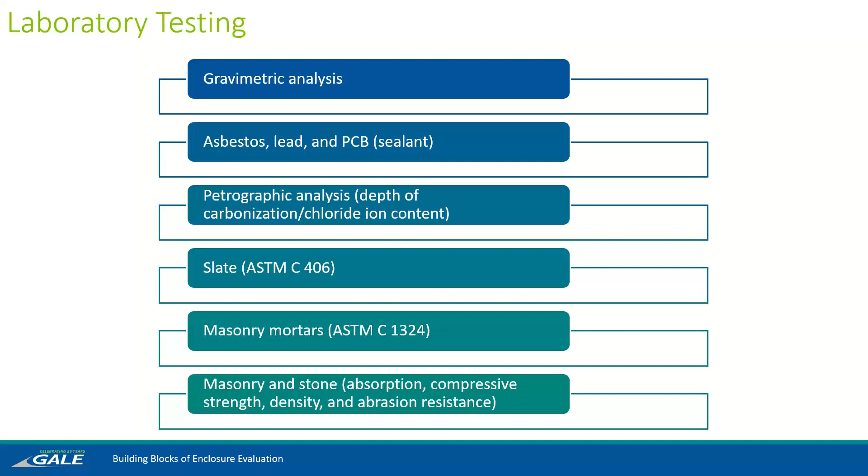Some laboratory testing options would be gravimetric analysis, petrographic analysis, various absorptions, compressive strength, density testing. Really, there's almost an endless list of test options here. We just presented a couple to give you an idea of what you might be looking at.

So we just went through a whole bunch of background information. We did a lot of field evaluation methods, access methods, defect identification, typical defects, testing, all kinds of stuff. So how does this all get wrapped up? So we're going to put together a report, and this report will be something that the owner can have that tells them the condition of their building, but also something that they can pass along for future projects, so that we make sure that everybody's aware of what we saw and then how it changes from then on.

So what goes into a report? We have the 6 C's. Those include condition, cause, culpability, correction, cost, and calendar. So we want to make sure that we are hitting all of these 6 C's. And what we do is we utilize all of the different methods and items that we previously talked about so that we have comprehensive information that we can put into our report. So that's the existing conditions.

You also have thermal insulation, which seems to be ever increasing for roofs especially, and the test cuts like Kim talked about help us to determine what's the height of the insulation and then how much insulation we need to put. It's not easy just putting more insulation. That sometimes can create a domino effect. You've got to raise all kinds of equipment or dunnage or doors and things like that. So that's one thing during the evaluation where we see what's impacted.

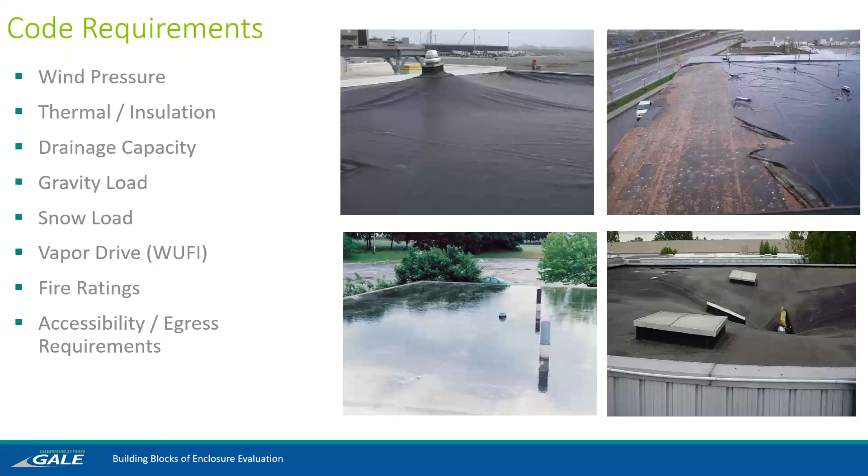So accessibility in Massachusetts is required on publicly or state maintained buildings after we hit a certain threshold. So we want to make sure that we're understanding what the impacts are of this project. If we're getting over a certain percentage of the building, that may actually trigger repairs and other upgrades in the building, not just to put the roof on. So, repair recommendations.

This is where we want to get our existing condition code requirements and then put together the recommendations for the owner so they can understand what they need to do to fix these issues. So that includes defining the scope of work, system selections, making sure we're meeting the client's needs.

Do they want to put solar panels on this roof? Do they want to change the access method? They want to try to avoid what's on the bottom right there with the roof hatch right on the edge. But how would the owner like to deal with this? Put rails up, relocate it, put a ladder up, things like that.

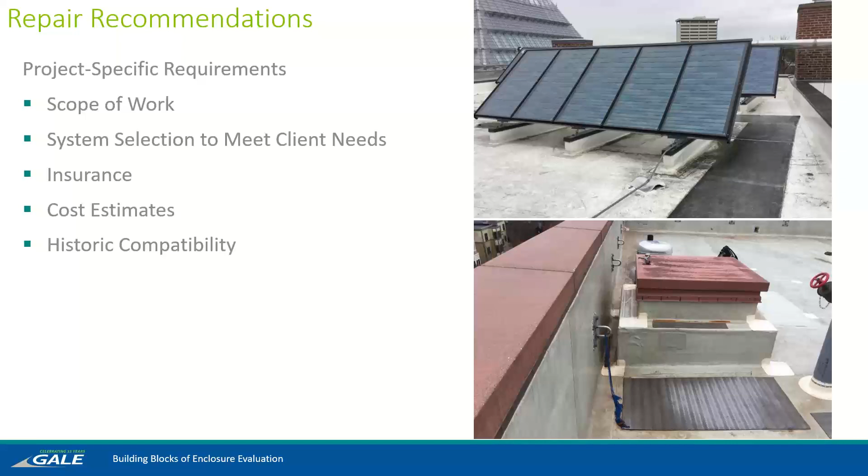Also putting together cost estimates and making sure that everything that we have, if it's a historic building, is compatible and goes through proper reviews so there's no issues during construction. So repair recommendations, we can help with scheduling and also defining that in the report.

So is this phased work? Is it a full facility? Do we need to do multiple roofs in different years or all together? And also helping to define that long-term plan. So timeframes: usually there's immediate, and this is like fall hazards or active moisture infiltration.

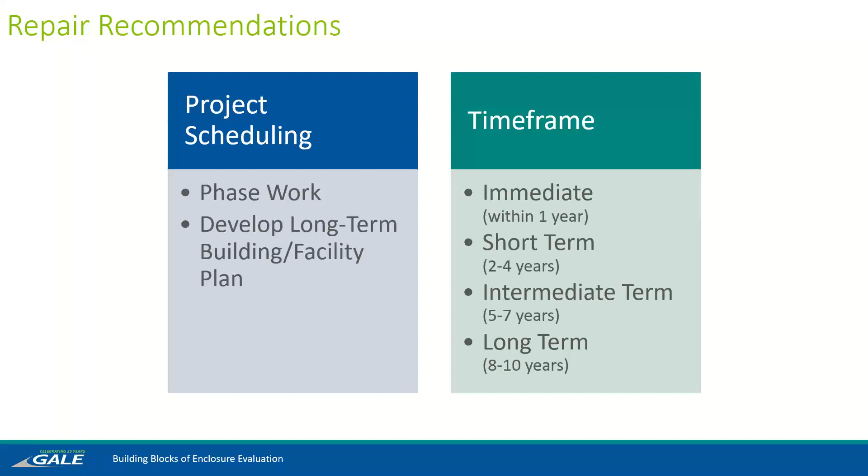We also have short-term, which is like 2 to 4 year repairs, something that's on its way out but can last a couple more years. Intermediate repairs, something to plan for in the short term and the intermediate term, and then long-term repairs for long-term planning, which is the 8+ years.

So here's an example of a cost estimate that we put together for a full facility roof replacement job. As you can see, it's color-coded by the terms. These terms are a little bit different than what I just went over. The owner had their own request for the terms and how they planned their budgeting for their repairs.

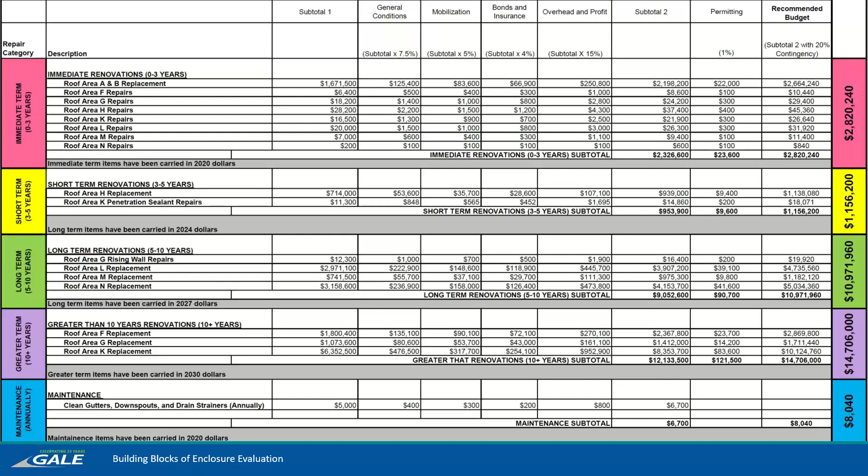So as you can see, in the immediate term, we had to replace a couple of roof areas, and then we did repairs to a number of other ones. And that helped extend the service life so that we could plan those out for longer term. As you can see, there's quite a bit of money talked about for roof replacement here for this full facility. So we have to help them spread it out so that it can be budgeted and taken care of. And this all gets wrapped up into a report.

So we went through a whole bunch of different things here. You're not going to typically use every single thing that we had here on one project. You're going to tailor it to that specific project. We're going to make sure we're using the right test methods, right access methods to get the project done. But this was a nice little overview, and we wrap it all up in a report.